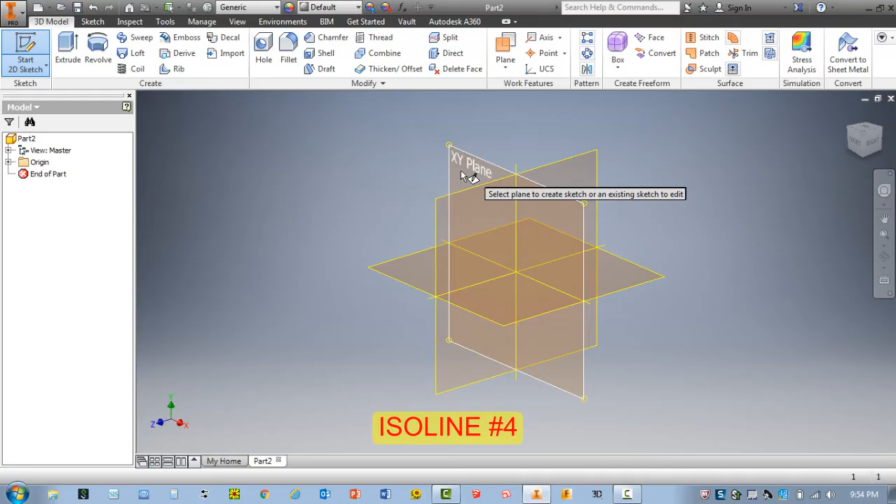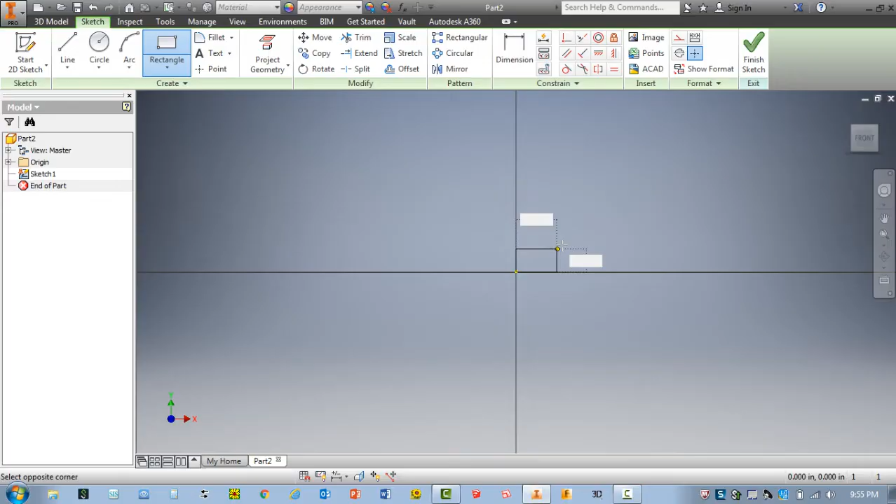So I'm going to click once here, and I'm going to start with the rectangle tool. I can either click here or right click and select 2-point rectangle. Either one is fine. I'm going to click once at the origin - it's always important to start at the origin. Click once, release your mouse, move in the direction you want to create the rectangle, and I'm going to type in for the length, which is the first number, 5. I'm then going to hit my tab key, and the height is 2.5, and hit enter.

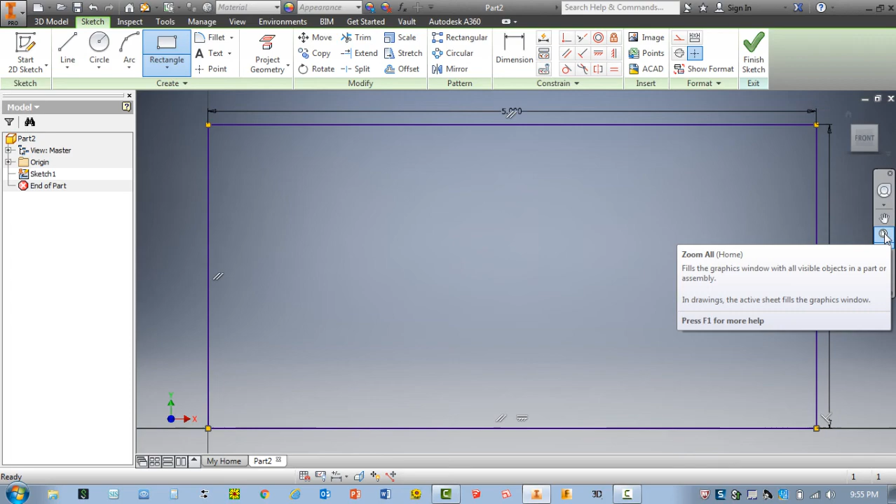Now we can see that this object is much larger than our viewing space, so I'm going to hit zoom all, or I can also double click on my mouse roller wheel. There we go. And I'm going to go ahead and finish sketch. So you can see this is sketch number 1. I'm going to go ahead and select finish sketch. Okay, I'm going to go ahead and do a zoom all again.

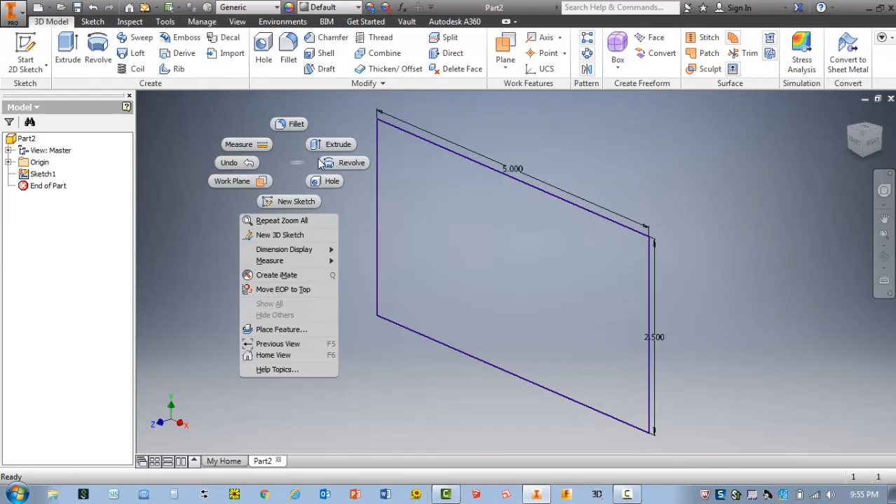And as always, we're going to do some extrusion here. Once again, you can either click here, or hit E on your keyboard, or right click and select extrude. We're going to take this face here in the front view. We're actually going to have it move in the opposite direction, and I'm going to type in for my distance 1.5, and select OK. Okay, so you can see under Extrusion 1, we have a sketch called Sketch 1.

Okay, now we're going to go ahead and select another new sketch. I'm going to go ahead this time and select the right side view. I'm going to click here once. You can now see we have sketch 2.

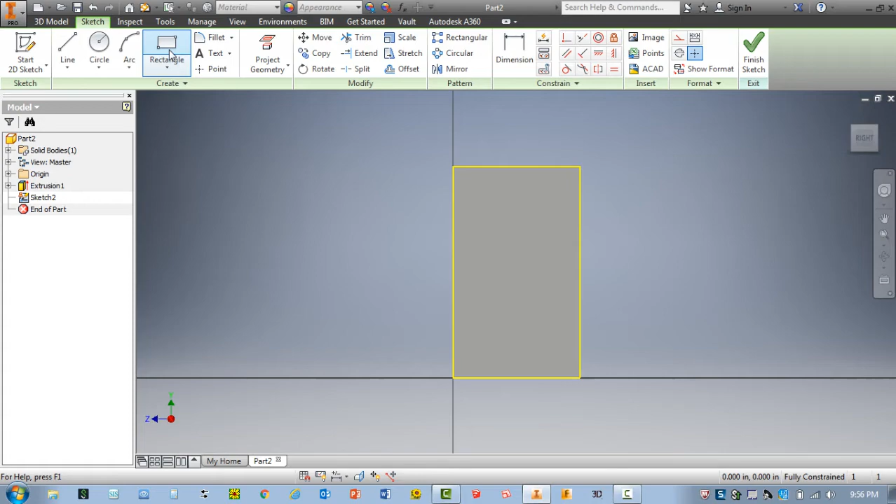This time around, I could take the rectangle tool. I'm going to click once in this corner, click, release your mouse, just drag, and this has a dimension of 0.5. I'm going to hit my tab key, by 0.5, and hit the enter key now. And just keep in mind, like any program, if you ever do make a mistake, you can always hit Control Z. You can also hit Control Y to bring it back.

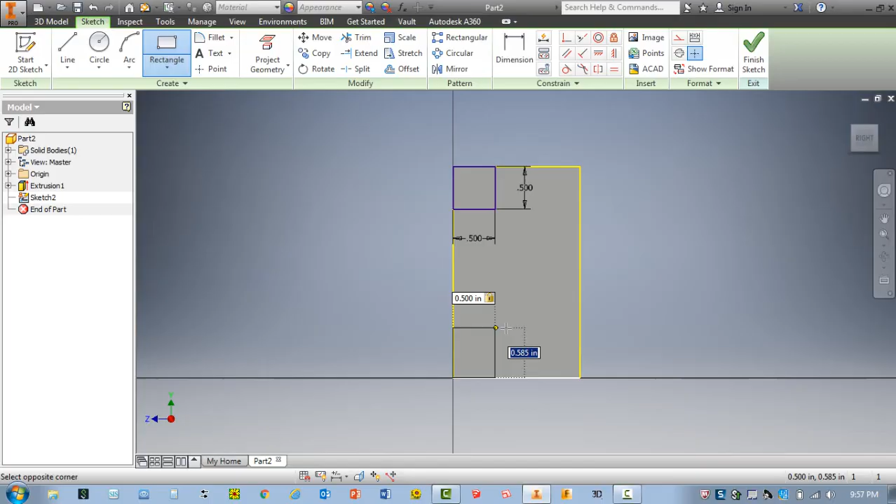I'm going to hit the rectangle tool again. Bottom left-hand corner, click once. Move up and over, once again same dimensions, 0.5, and then hit my tab key, 0.5, and enter. Now, I'm going to go ahead and select Finish Sketch. Okay, always finish a sketch when you have put some geometry on a face. And you'll notice this is sketch 2.

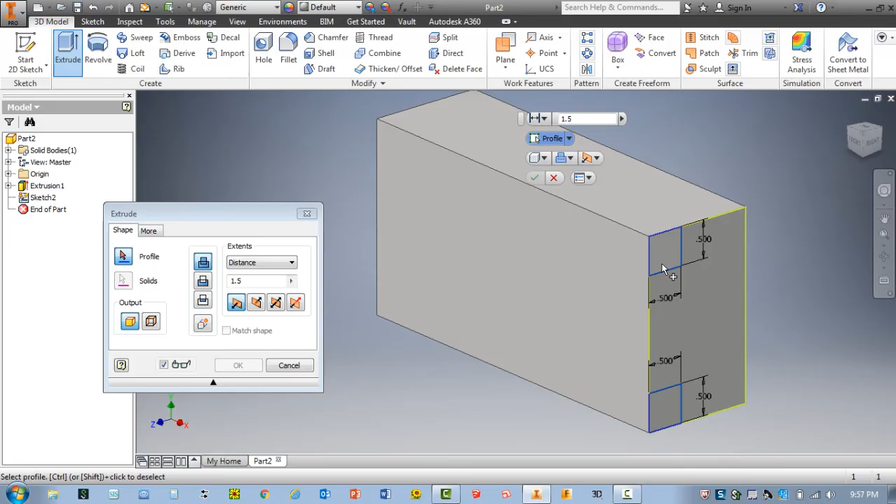Now, this is going to be a little bit different than we've done before with the extrusion. So watch how I do this. I'm going to hit extrude. Okay, I actually want to extrude this and this, but you'll notice it'll only let me do one at a time. So let's start with this top one. I'm going to just go ahead and click here once. Okay, remember, you can also click and drag that arrow in the direction you want to extrude.

I could even push this all the way back if I wanted to, but another little trick is to actually use what's called through all, obviously making sure I'm extruding in the correct direction. Now, it won't let me click here, so here's what you need to do. Select this option called Profile, and with Profile I can select another face that I want to extrude. Okay, you can see I've extruded 2 faces. I'm going to go ahead and select OK.

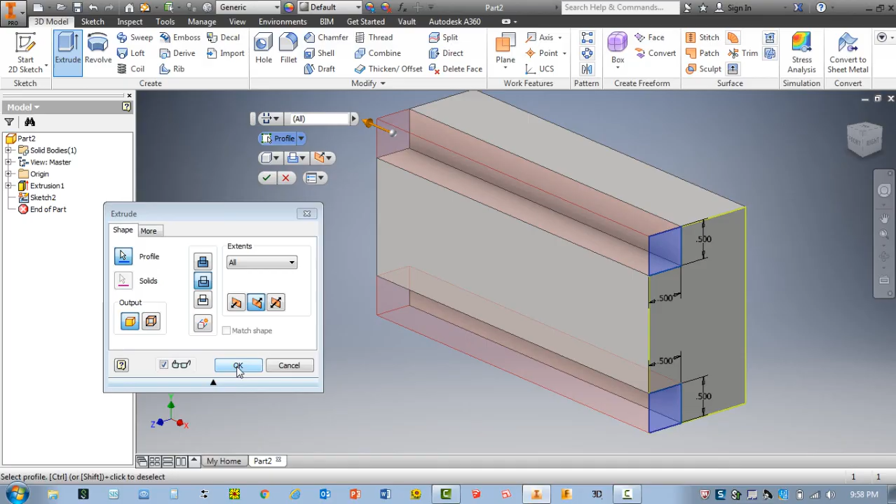I'm going to go ahead and do a zoom all, make sure I'm in my home position. And I'm going to go ahead and save Isoline 4 to my H drive in the Isoline and IsoCirc folder. Good job.